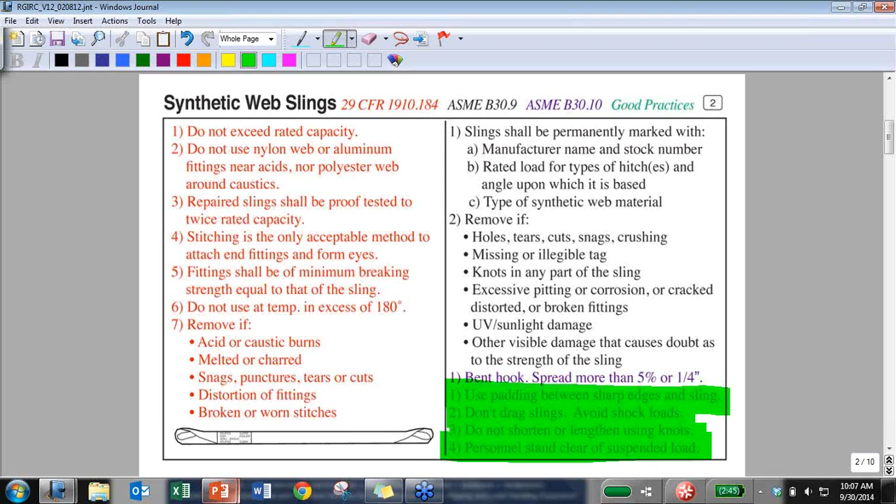Moving back into our presentation, we can see some of the information includes damaged or cut webbing, the body of the web itself. Let me jump into this one more time and see if we can get this going. But one of the things you can see is cuts,

abrasion. What else was there? We could see holes, cuts or snags, and crushing. Missing or illegible tags, that's really from the manufacturer, and they should be the ones that tag those. That's going to identify who made it, possibly when they made it, and what its capacity is. Those are really useful information pieces for the user at the end of the line.

One of the big things about synthetic web slings is they're really susceptible to UV and sunlight damage, and we've seen studies over and over about how much damage they can receive from just being out in the sunlight. Some of the southern states have big problems with this, so they keep most of their equipment stored indoors and out of that sunlight. I think that's good, but even UV damage from indoor lighting can cause problems.

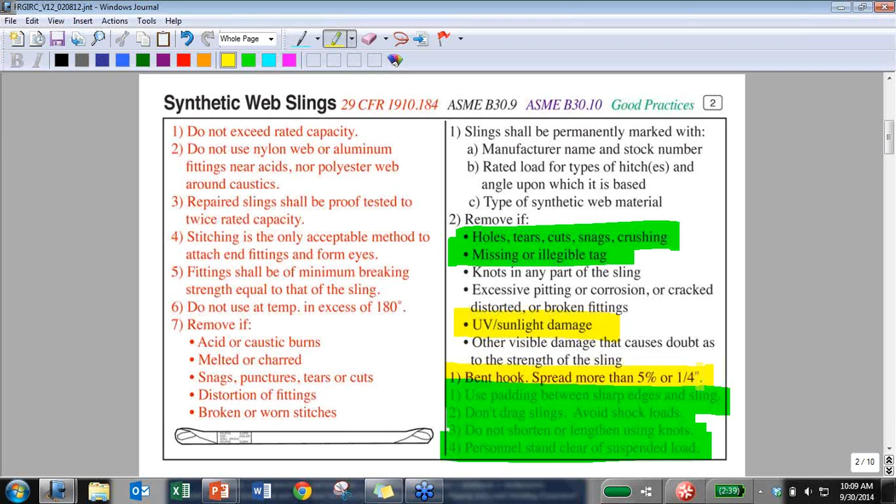Moving into this category again, it doesn't only include the web sling itself. If you look further down, notice the comments here: bent hook and spread. The hook is spread more than 5% or a quarter inch, and that has to do with the end fittings, referencing B30.10. The end fittings also count as part of the synthetic sling, so even if the web sling is perfectly fine with no cuts or damage visible, the end fitting still matters. It's sort of the weakest link, so to speak.

And so when we look at this, we're looking for end fitting damage. Moving on, we'll talk about the tag as well, right? We talked about missing or illegible tags. Much of what we see in synthetic web sling removal criteria can also be said for chain sling removal criteria. Let's look at the next slide down here.

Panel 3 of our rigging gear inspection card also talks about alloy chain slings. We get a lot of our information here from ASME B30.9 as well as point 10, because that deals with the end fittings as well. We use chain slings a lot for heavy-duty knuckle dragger type work, meaning we tend to put them in environments that are caustic and abrasive, expected to do really well, and they tend to. But we still need to be aware that hot or even cold environments can really play a major role in reducing the capacity of our rigging gear.

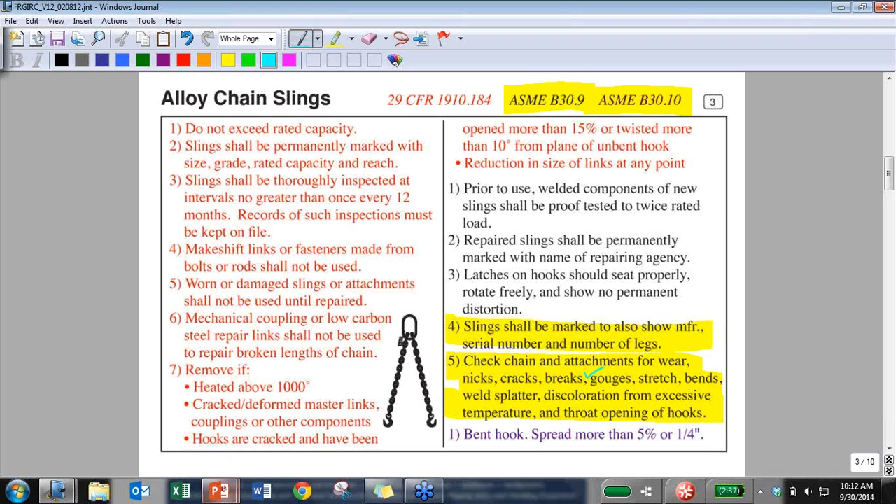Discoloration or from excessive temperature, weld splatter, stretching of any kind, gouges, and of course breaks. If we see any of those, we really want to remove it from service, take an evaluation of it, and see how it can perform or how it can be made whole again.

And so we'll look for gouges, stretching. Again, the tag itself should have capacity as well as who made it.

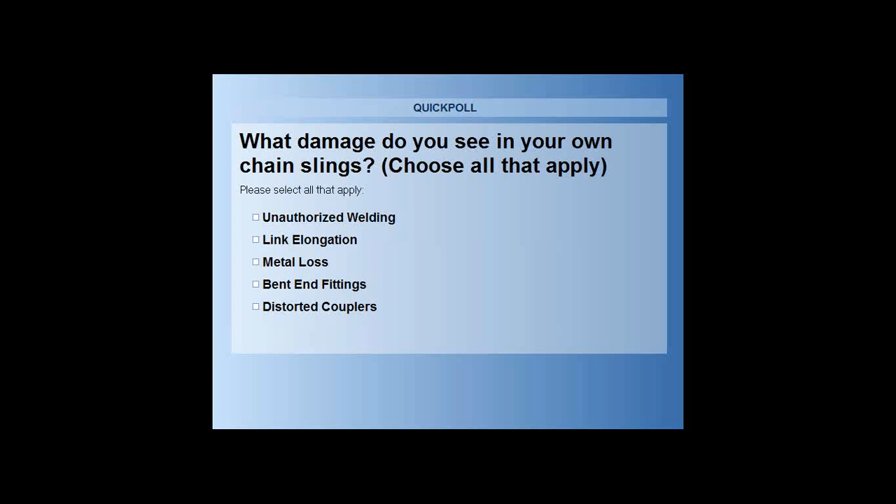Great, thank you. Yeah, thanks everyone for taking our polls and just providing a means to discuss. It really, end fitting damage, I think it occurs a lot of times because we choke chains around all types of things. I mean, I-beams and bundles of loads, and really that's the piece that gets kind of wrapped and bent around those things, and you can see a lot of damage.

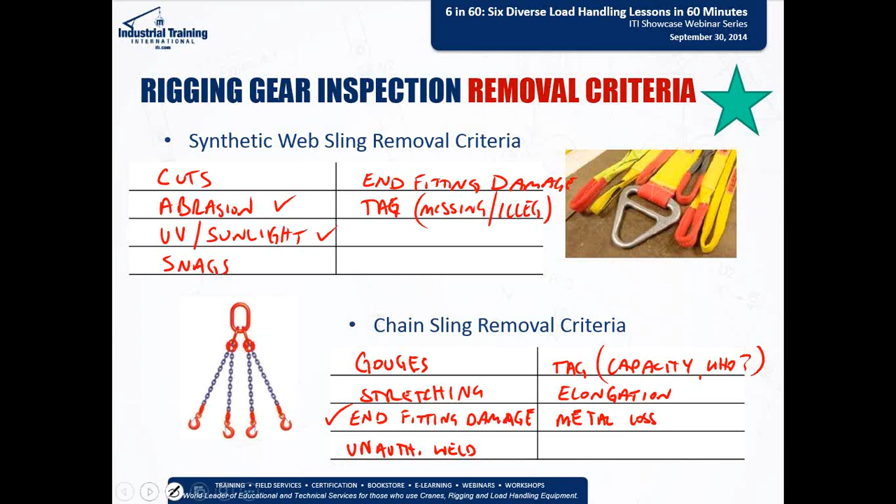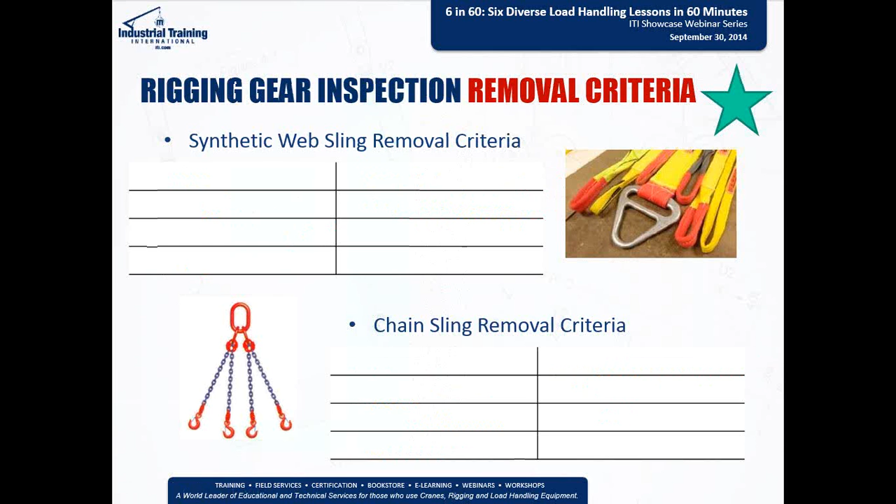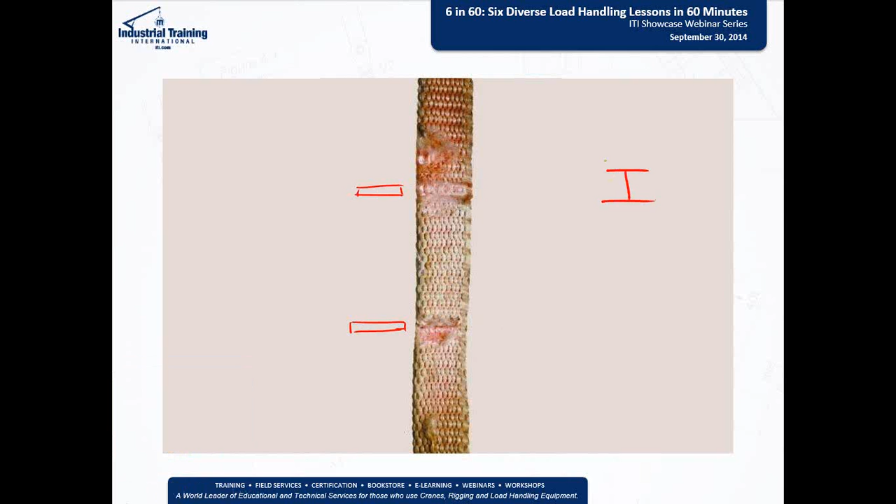We're going to take a look now at a couple examples, and I just want to talk briefly. If you look at our first example, we'll talk about synthetics first, then chain. If you look at the damage here, we can almost kind of see this really even section of abrasion, maybe some cutting in here, and it's possible that the sling itself was possibly wrapped around an I-beam like this, and really those points of contact are going to be where we see a lot of damage.

Some people even say it's just the surface strands or surface pieces of the nylon itself, and the real strength is underneath. But gosh, it isn't like a sheath. The web sling has webbing all throughout it, and every fiber provides some form of capacity. So taking some of these fibers away really reduces that capacity.

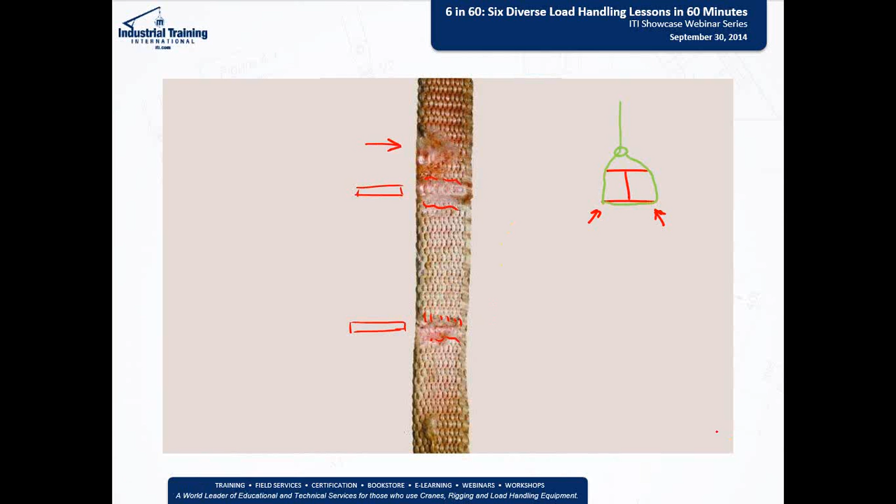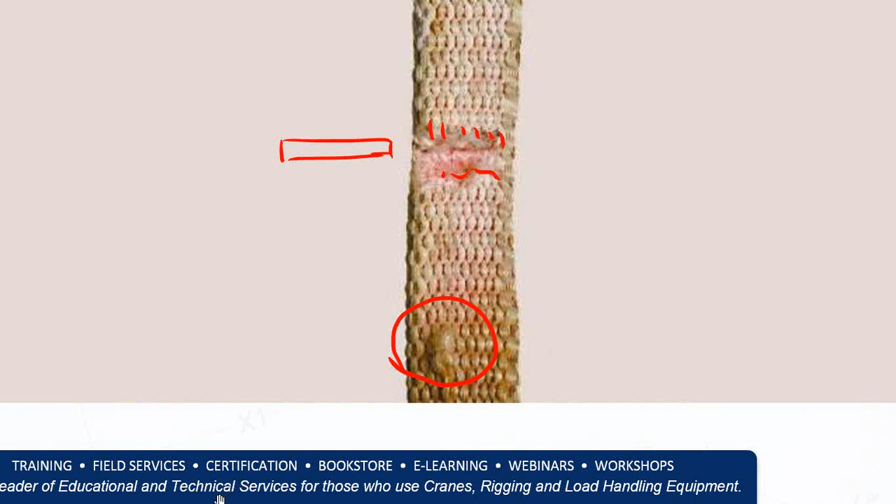We also notice a snag up here. If anybody else can identify anything, there's actually one more, kind of hard to see, but if you look down here, there's a snag at the bottom, and it provides a visual indicator that something's not right about the body of this web sling, and we can start to see a little bit of capacity being removed from that sling itself.

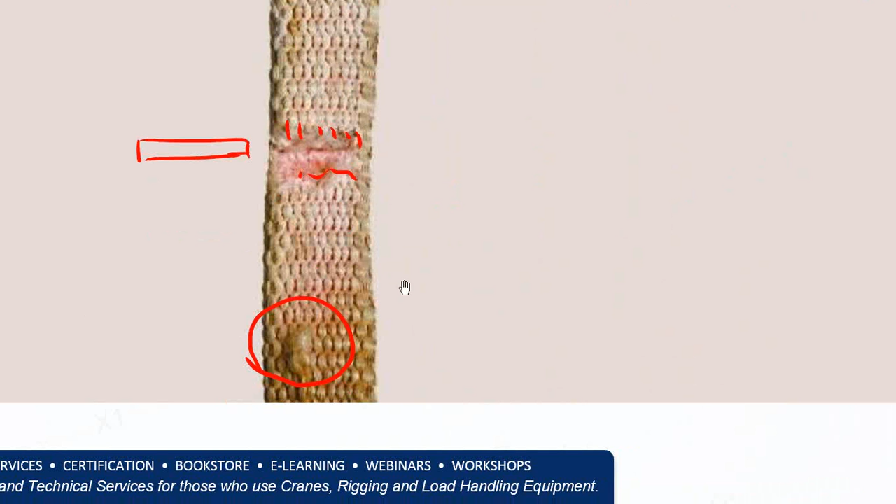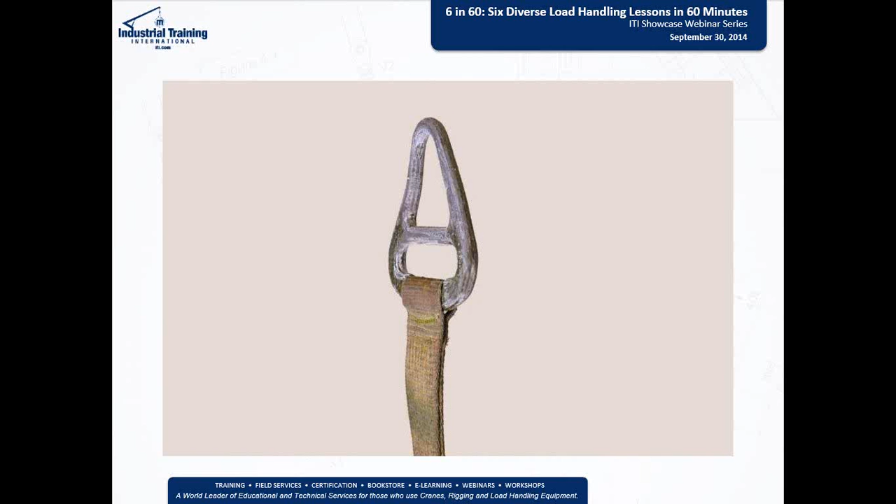So we just want to make sure we're identifying these things as we see them. Let's move on to the next sample here. Possibly even the same body, but now we've attached an end fitting to it, and end fittings do count. We talked about end fittings as a link in the chain of capacity, and if we see damage there, we need to consider what other damage is present, and also how much damage has taken place, and possibly remove it from service. But if we look at this end fitting here, we can see a bowed shape on the top triangle section of this triangular master link.

There are design factors for slings themselves and hardware you can attach to them, and if we see a bent fitting or a bent end fitting, we've jumped right into that design factor and taken it up to its yielding limit, not even its working load limit, but its yielding limit, and we're starting to change the structure of the end fitting as it was originally made.

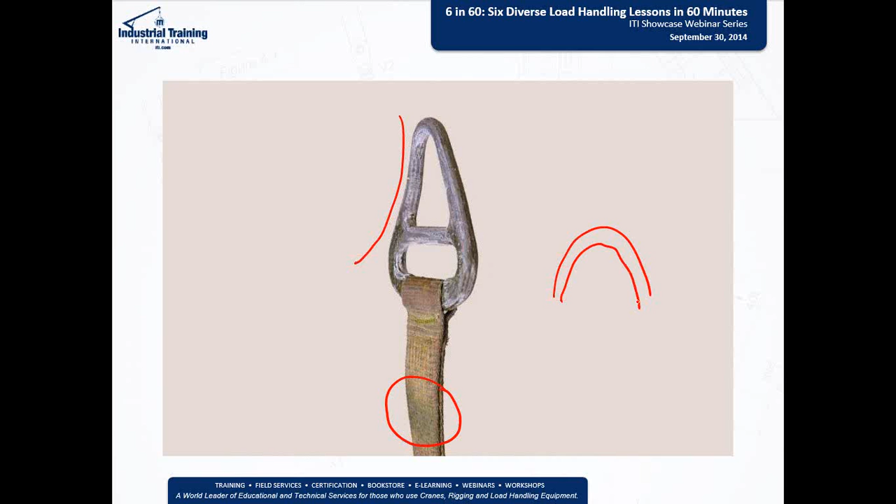Possibly also some maybe chemical or oil damage down here. A way you can tell if something's been chemically introduced to a web sling is, sometimes it'll burn and start to abrade, and when you bend it around a piece, you'll start to hear little crackling taking place, and those are the actual fibers that are breaking in that web sling. So, excellent examples here.

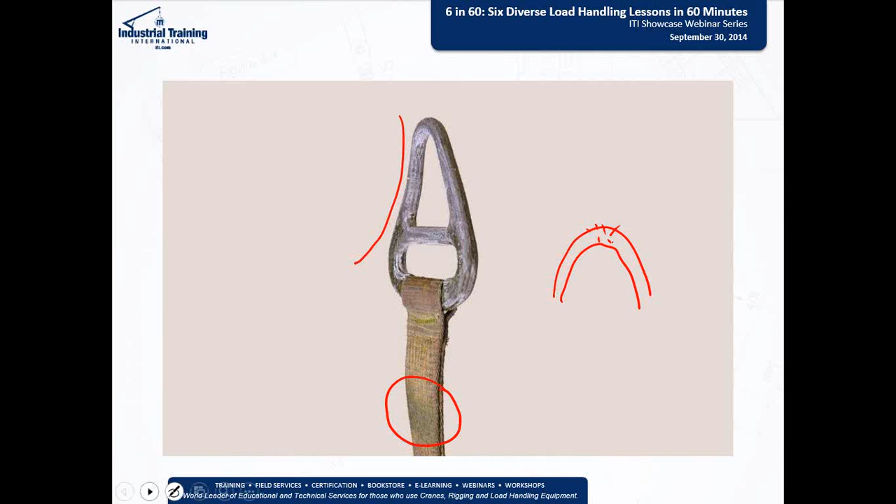Let's move on to some chain examples. Immediately, if you're looking right at the center of this chain sling, we see maybe a crack right here, and these are just some ways to identify damage. This chain link really looks damaged in some way, like it shouldn't bend, or maybe if it does, it can't bend anymore.

Maybe it's been elongated further. Maybe it's possibly a low carbon type fitting, which we don't typically use in rigging, and so it's a way to identify, and that's the last thing you want to see when you throw that choker around the load there.

Another thing too, if you notice the elongation here, typical chain links tend to have a strong oval presence, and here we can see we're almost pinching the middle as the chain is elongated, and it starts to suck in. It's actually one of the visual indicators of chain slings being elongated past their capacity, and so we've taken this sling over capacity itself.

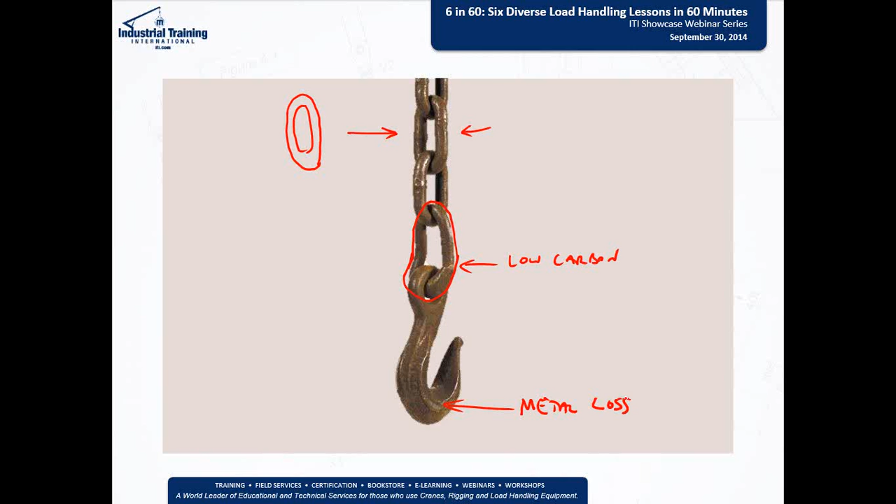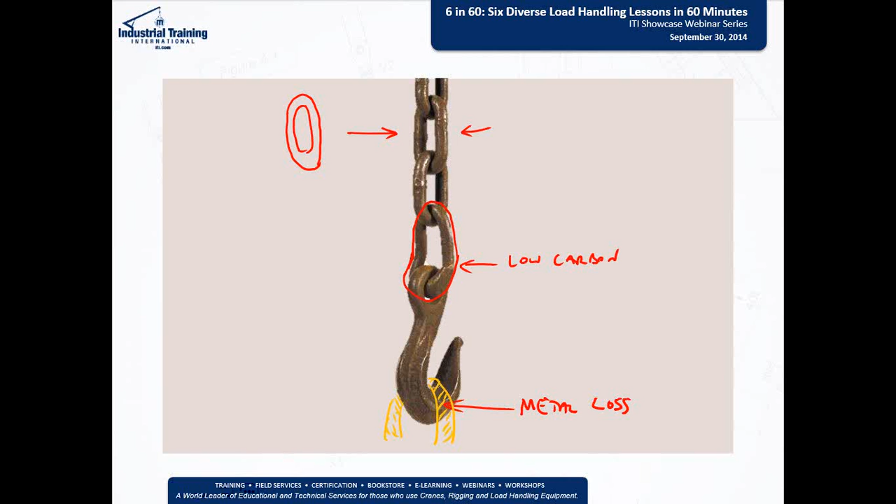Also, what happens if you put a web sling into this hook? What is that going to do to that web sling itself? If we drape or rig a sling or other piece of hardware into that hook, what is it going to do? Will it snag on that web, or will this web sling snag on that metal loss piece? Maybe it's a sharp piece or a sharp end. And what kind of damage is that going to do?

How do we know how long the chain is supposed to be if we never know its original length and measure that against that original length?

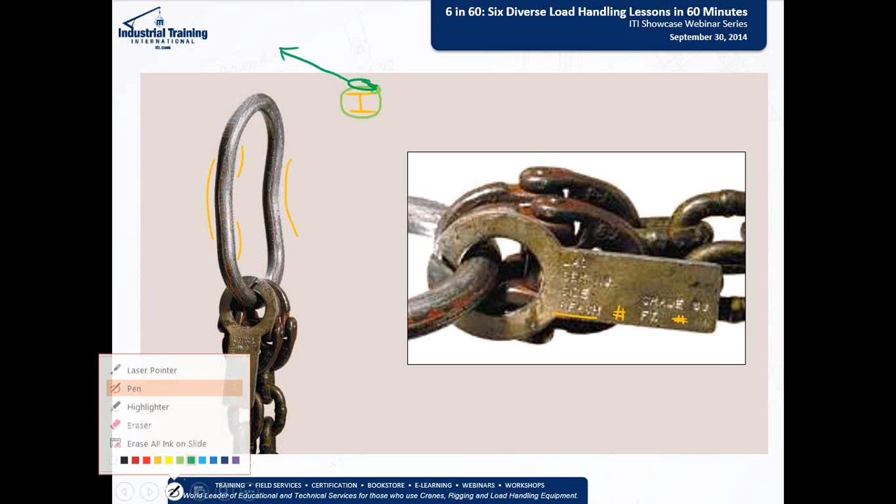One last piece here is the master link is drastically bent. You can see a couple concavities throughout that entire body, and this happens commonly if we're rigging from a top-down view. We're rigging from an I-beam, say a column, and we take maybe a choker sling or choker hitch around here, and we attach a chain sling to it. The master link comes off this way, and now we've all of a sudden changed directions, potentially from pulling this way to now pulling south here, really bending that body around the master link or the column itself. That can really damage the master link and reduce the capacity for that entire chain assembly.

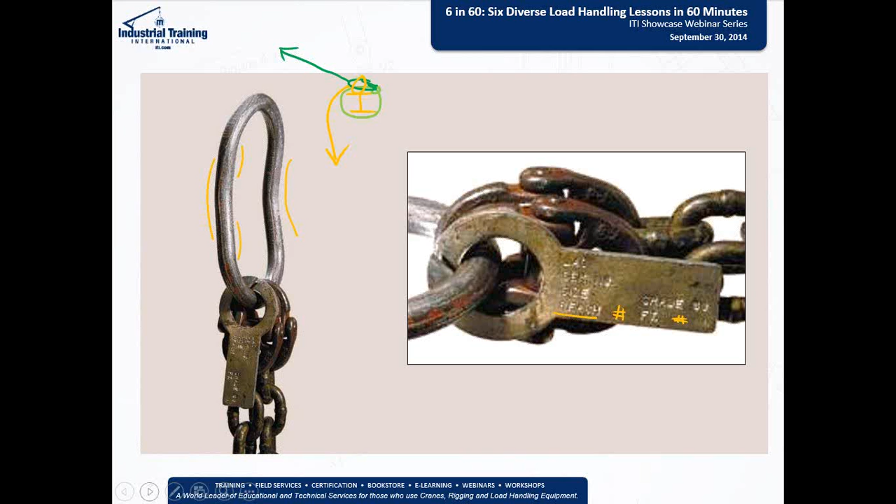So we've looked at some samples here, and we're going to move on, but these are just some examples of general use and wear for web slings as well as chain, and looking at removal criteria for those things.

The next topic I want to talk about is in the advanced rigging section. The subjects we talk about often are inclined planes, load control, a lot about center of gravity—where it is, how to find it, and how to rig to it—snatch blocks and winch systems, come-alongs and chain falls.

A lot of times not every industry or user has a chance to experience drifting of loads, but it's good practice to get familiar with it and see what else is out there. Jack and rolling rigging is sort of the horizontal rigging we introduce in a lot of our classes—again, hardware from companies like Hilman and Stearman. There's also, I'm sure, lots of other horizontal rigging companies that use rollers and those types of things, but really exposing guys and gals to our different pieces of hardware in the industry.

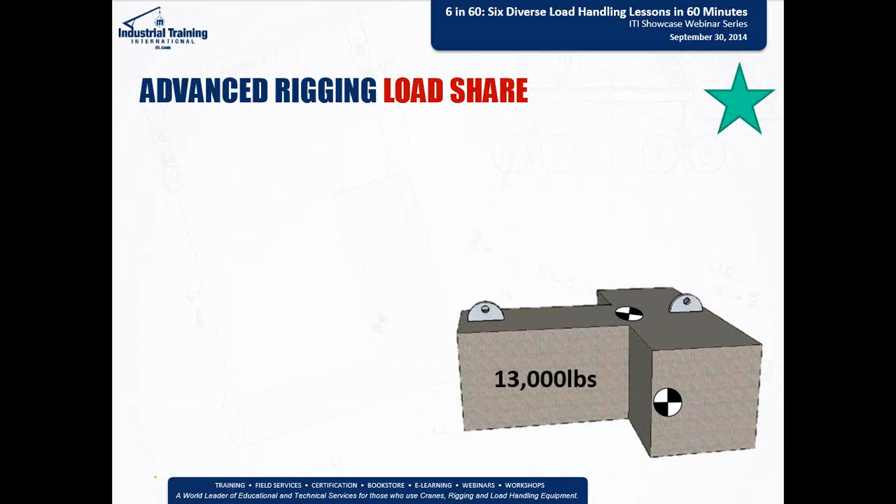We've got a poll question here in a second, but let me introduce you to the load itself. We've got a 13,000-pound load. We're going to get a little expensive with our rigging and crane operations here, so we're going to lift it with 2 cranes, one on lifting lug A and one on lifting lug B—I'll reference crane A and crane B respectively. All we know is that we've got a center of gravity logo here, and that's where the center of the weight and mass is located, and some distances—the distance between crane A's pick point and crane B's pick point to the center of gravity.

Well, intuitively, let's talk about which crane do we expect to have the most load? Just kind of looking at it and thinking about it—let's launch that poll question. Based on the load weight and the lifting point's location relative to the center of gravity, which lifting point will lift more? Your choices are A, B, or they'll have an equal load share.

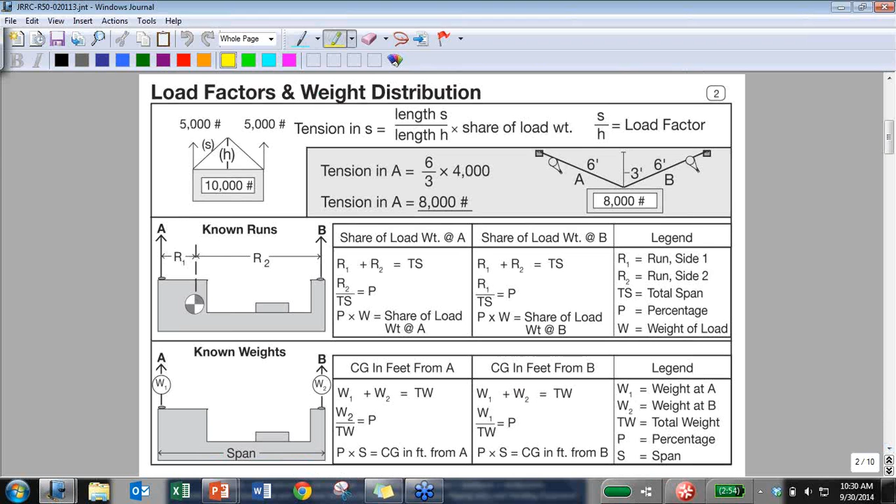If we look at the Journeyman Rigger Reference Card, panel 2, we talk about the share of load weight at A and share of load weight at B, and we're talking about these 2 pick points. It's really a similar problem here.

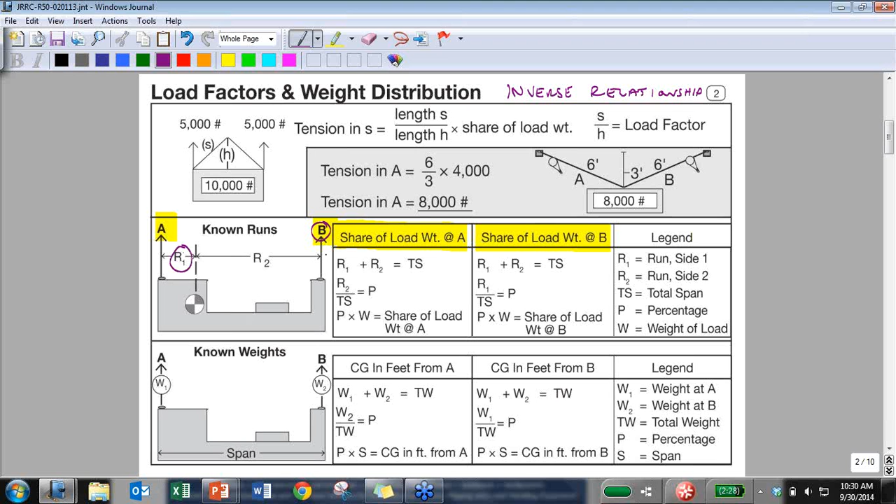But if we look at how to come about these answers, we look at a term called inverse relationship. That's just a fancy term for whatever happens between the center of gravity and, say, pick point B. We're going to use the span between A and the center of gravity to figure out the loading at B. I'll show you how that works.

It's really a cool concept. It's something everybody already knows intuitively, physically, but when we put it on paper and get guys out in the field, this is kind of a newer concept they have to learn arithmetically.

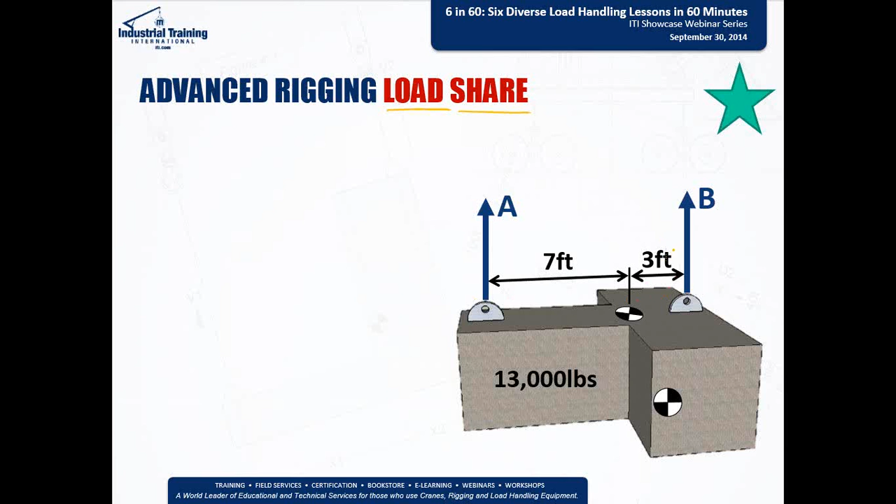So if we take a look at this concept, let's take A for instance. At A, if we look at the inverse proportion, inverse relationship, we know the loading is going to be some proportion of 3 divided by the entire span, which is 7 plus 3.

So this is the equation, and this boils down to what we can give as a percent or a fraction of the total weight if we're only using 2 pick points. In this case we are, so we're looking at 30% of 13,000 pounds, which yields about 3,900 pounds being lifted by crane A.

If we do the same type of relationship with B, now we're taking the distance between A and the center of gravity and applying it to B, with the entire distance between A and B. And really, we're going to get 70% of this load.

You'll know you've thought about it correctly if these two come out to be 100%. Can't get more, can't get less if you're lifting with only 2 points. So we multiply that by the entire load, and get the percentage in load form at B, which in this case is 9,100 pounds.

So if we take the entire load out of it, say this was a person sitting at this center of gravity point, closer to Bob on this side, and he was lifting up, and it was further away from Sally on this side. Which side would you rather be on if you wanted to lift the least amount of weight? Side A would be my answer.

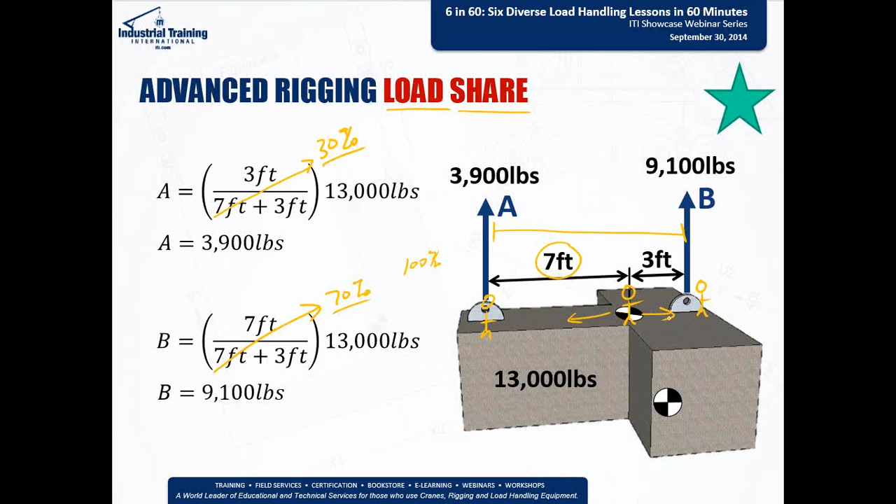Certainly, as the gentleman slides from left to right, he'll start to increase or decrease his share of load across that distance. Excellent. Let's move on.

So we've got an idea of load share itself, and we've talked about A and B. We're going to get a little bit less expensive - we're going to hire just one crane now for our lift and use 2 slings, and we're going to rig over the center of gravity. Our hook is going to come up to this point here.

Now that we've included an angle - the angle I'm talking about here is this angle right here at A - if we know that originally we're lifting 3,900 pounds, the poll question here is: will the increased loading also increase the tension, or sling tension in sling A? Will we get that much less than or more than 3,900 pounds because of this induced angle, because we're lifting and rigging to the hook itself? Jonah, let's go ahead and launch that question and see where we land.

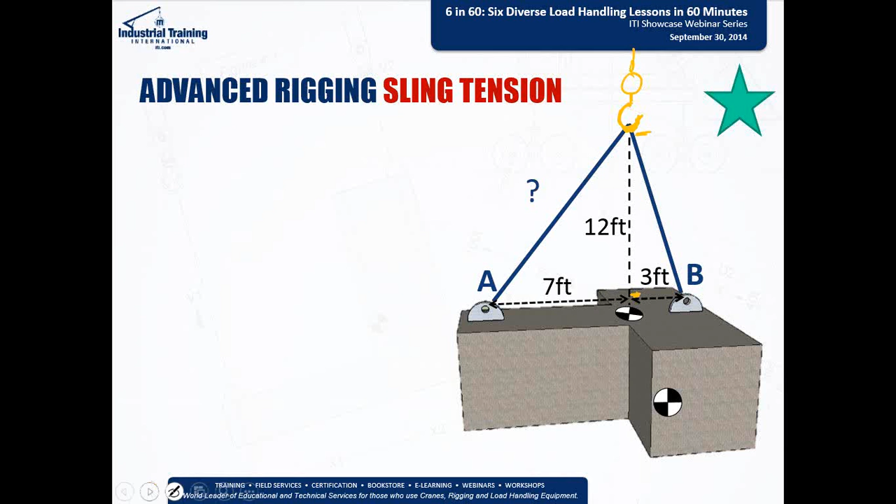Great, thank you. Yeah, thanks for your respondents, guys, and we'll talk about how it actually affects that sling load, or the load inside the tension itself. So if we induce the 12-foot headroom between the pick points and the hook, we still have our distances of 7 and 3 between the center of gravity and the pick points themselves. We wonder what the sling length is, and a quick way to do that is just the Pythagorean theorem.

I think it comes out to 13.8 feet, but it gets really expensive if you go right there to 13.8 from a manufacturer's point of view, so usually we typically round up to 14 if we need it. So I've kind of done that math for you, but if we look at the tension factor and what happens when we induce that angle, the tension factor is nothing more than the sling length, which you got at 14, and the height between the connection point to the hook and the elevation of this lifting point here at A.

Which we found to be 12, right? And so if we look at it, we're just talking about a factor here, so we're not actually going to find the load weight just yet. But if we look at the factor, we get a factor of 1.166. And really what we're talking about is we're increasing the load by 116.6%. That's really what we're talking about here, is when we induce this angle in the load as we start to rig up to the hook, we're increasing that load share in the sling tension by 116%.

And so if we take a look at the tension in A, we know that originally we had 3,900 pounds, and if we multiply by that tension factor, we can arrive at what we expect the sling tension to be when we start to lift this load. And really, this is the number, this is the loading that we should size our rigging to.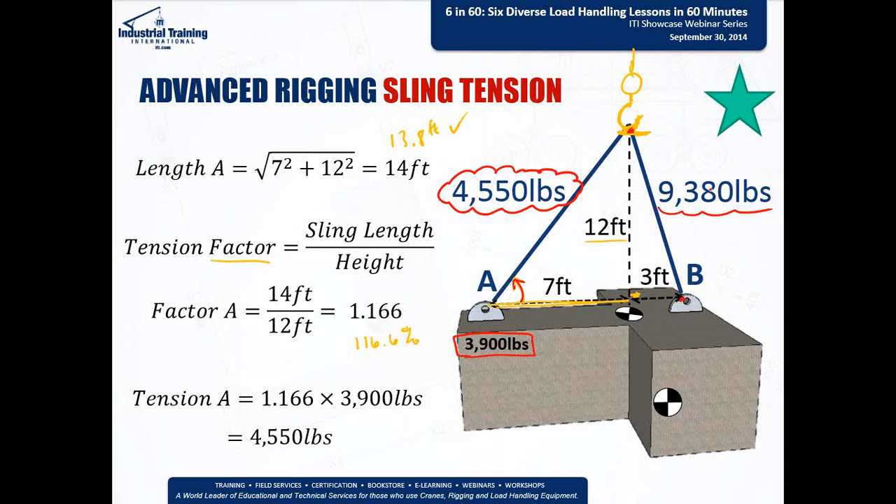Great, I'm glad everybody was able to follow along. If you get a chance and want to do the same type of calculation, figure out the distance between the hook and B, and go from there, and you should get around 9,380 pounds. Let me know if you don't.

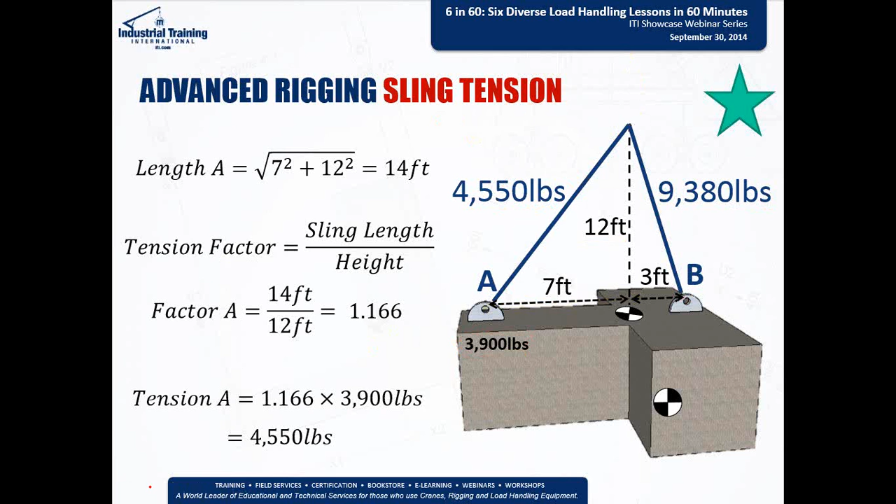Great, let's move on. So one of the next steps is looking at critical lift planning. We've got a course, and a lot of the topics in this course talk about load affirmation. It's a lot of checklists, and we talk about worksite approval, verification of the crane, the load travel path and placement of personnel, confirming that the rigging is inspected and rigged properly, the pre-lift checklist. All these things are kind of in the pool of responsibilities for the lift director.

And so we talk about all these things and how to go about the planning steps of what a lift director should do. Moving into the learning objective itself, we're looking at using a scorecard to determine the requirement of, or to develop, a critical lift plan. And I know in the States we don't really have a set definition of critical lift.

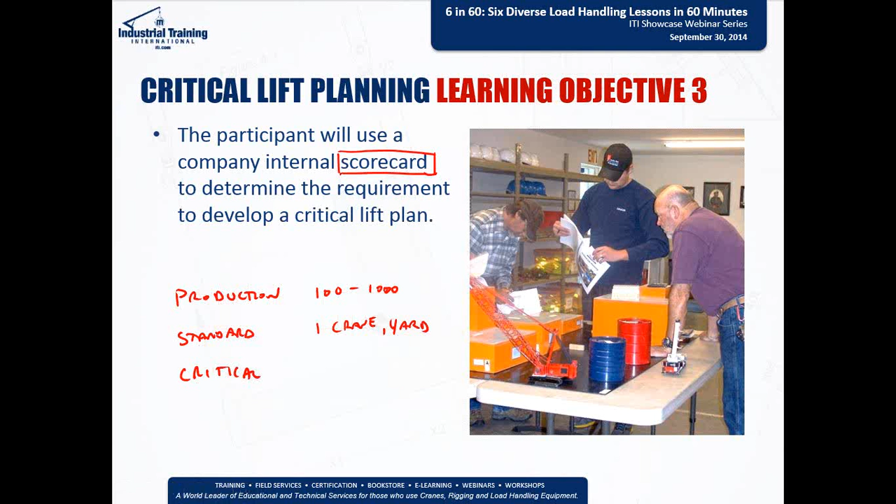It's really independent of the activity, but really dependent on what the company decides is valuable or risky or have you. So we recommend developing a scorecard internally to determine if critical lift planning is needed, with a little bit more scrutiny on the lift. There are times where we have production lifts, and you can do those things 100, 1,000 times, and they're really not going to change. There might be standard lifts where you use your scorecard and it comes out that this is one crane out in the yard somewhere, not really a hazard to anybody. And then in some cases we have critical lifts, and our scorecards provide a means to jump into that planning and evaluate how to determine a critical lift from a standard one, based on corporate priorities.

So if we take a look at the critical lift scorecard, this is kind of how we organize it. We have tons of different subjects here. We've broken down the lift itself into what the company prioritizes - we can talk about man basket lifting being automatically a critical lift, or at least one of the criteria. If we use multiple crane lifts, we've assigned numbers to them. We can also assign load values - this is one way a company says the replacement cost is more than we can bear, so we want more scrutiny for that lift. Moving down, maybe the environment the crane is placed in - an electrical prohibited zone, pressurized materials inside the load, or a turning type lift where upending or inverting occurs - those become very complicated, and this company considers that to require a little bit more scrutiny potentially.

So let's - I think we got one more poll question here, Jonah, is that right? We do. Let me launch that right now concerning the critical lift scorecard.

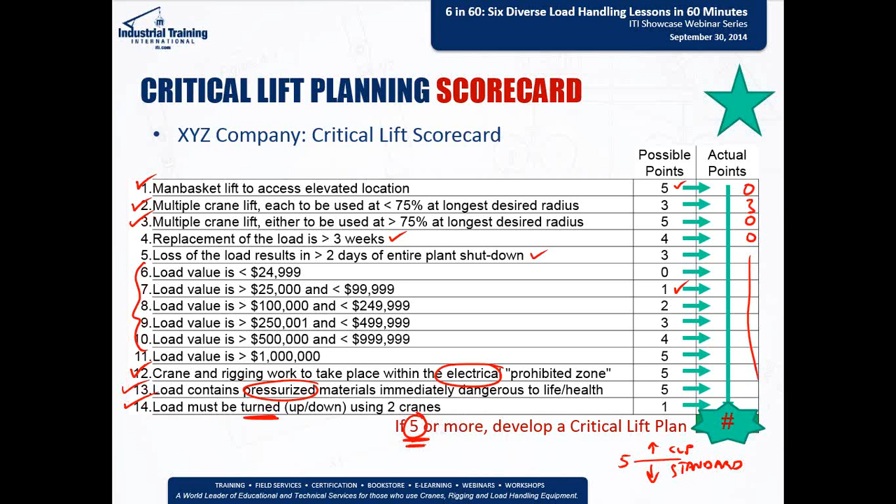We can start to determine if a critical lift plan is needed. So you get a chance to do this yourself. We'll go through an example here and look at the lift parameters for a specific lift. We're talking about one crane here, and you may have the sheet in front of you, you may not. I've got one printed out in front of me.

Going through this, we can determine and develop our scorecard as needed. Looking at the lift planning parameters, it's going to be a single crane lift, so we're going to get zeros for these. Load value is 89,000 dollars, so that gives us a 1 here, and we can limit our answers to these ones as well.

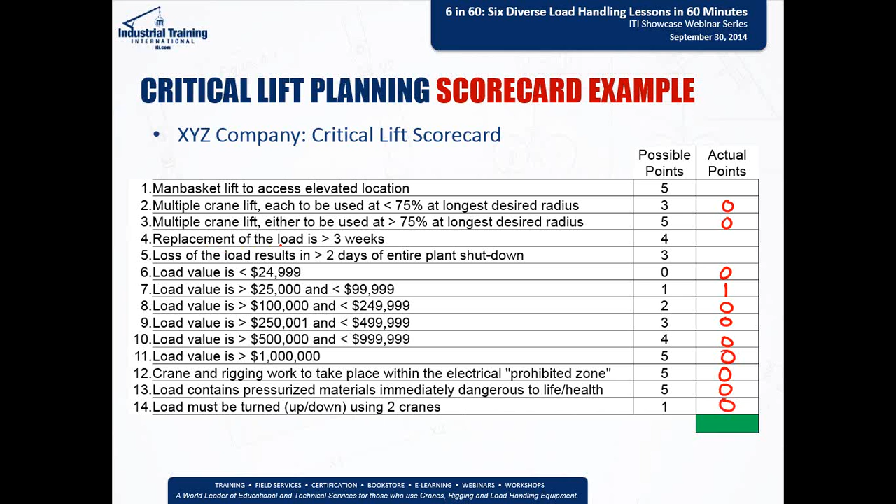No electrical hazards exist. Load's not pressurized. It's not going to be turned upside down or inverted or uprighted. We do see replacement loss of load results in a 3-day plant shutdown, and so here, if it's more than 2 days, we're going to get a loss.

We want to activate this criteria by including it in our sum total. The other piece of information here is load replacement is 5 weeks, and we've got anything more than 3 weeks as our criteria. Correction - we move here and there, not using man baskets at all. So if we tally these up, we see we get 8 as our answer.

If we're being honest, we look at our evaluation criteria. We know 5 is less than 8, and so this triggers a critical lift plan to be developed. We want a little bit more scrutiny for this plan, and we're going to move forward with that. So just a tool to use, maybe internally in your own organizations and crane and rigging operations. Great, let's move on with the next.

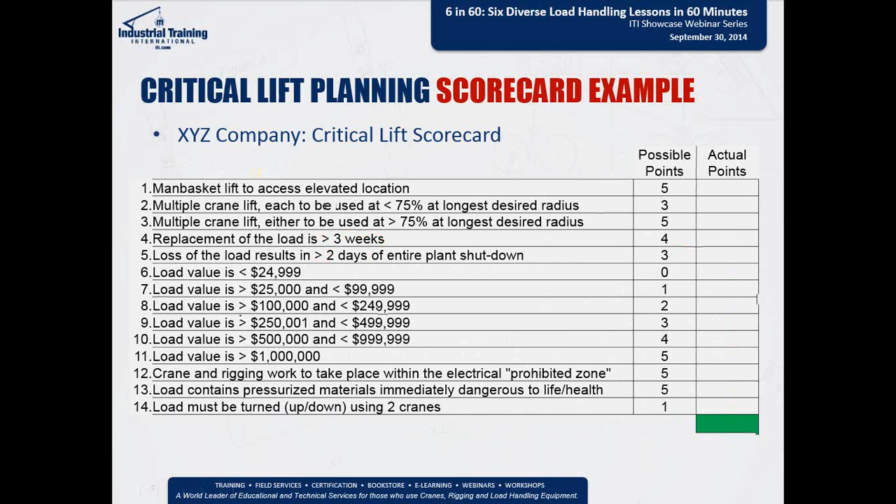It's a quick topic there, but hope everybody's engaged and interested. We're going to talk about mobile crane inspections, and the training subjects here are inspection requirements, based on some of the things we find in OSHA and ASME, as well as other federal regulations. How to do these inspections safely, what components we use or inspect - we'll talk about those different components, and then other additional safety items.

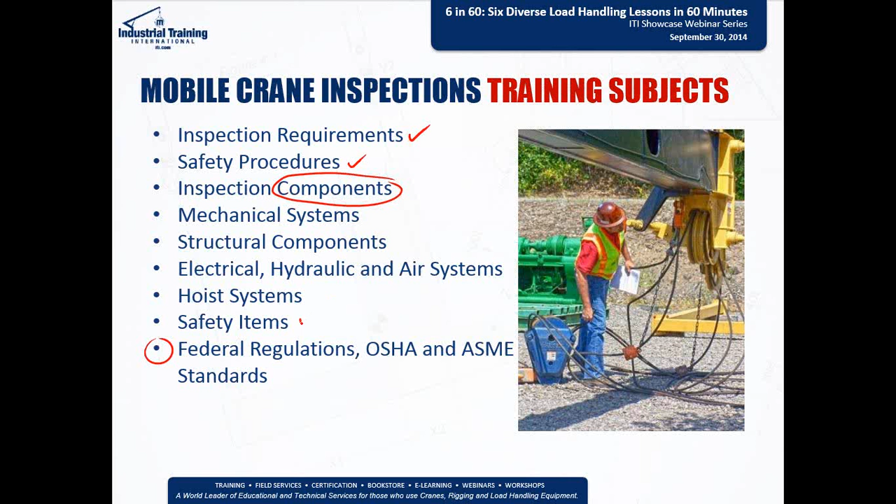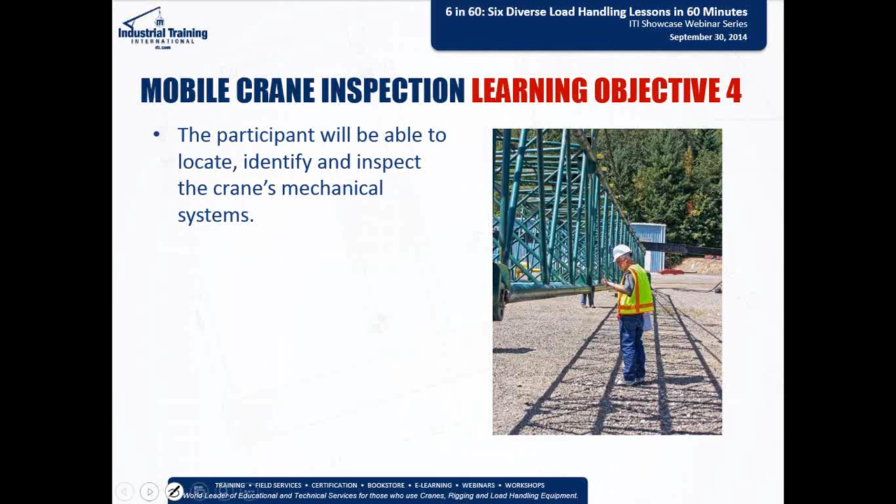The how-to when we actually go in and break down a crane and look at its parts and pieces, and make sure that it's still operational. So the learning objective here is to be able to identify, locate, and inspect the crane's mechanical system. And we'll talk really specifically about one piece of that mechanical system.

In general, when we talk about inspections, we really want to organize our thoughts around a simple acronym, and we use MESH. You may use another one, but MESH stands for mechanical - it could be anything from the engine itself that drives the drums, as well as wire rope. We tend to think of wire rope as a machine, so it's got moving parts, and if one of those moving parts is not moving, then we don't have a machine anymore. So we really want to take a look at that wire rope, as well as the engine and anything else inside the crane that deems it to be in that mechanical area.

We looked at the electrical section - these are the strain gauges, these are the LMIs, the load moment indicators, inside the cab there, as well as any other indicators that we get electronically. Make sure those are functional, operational.

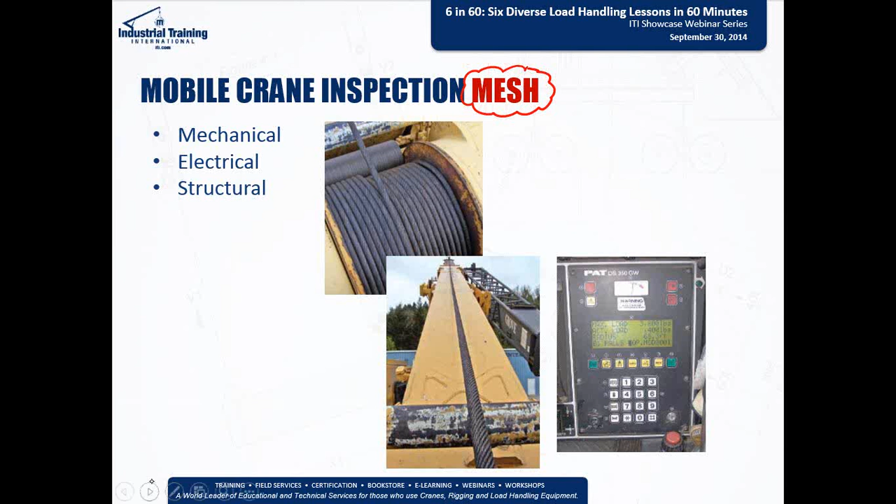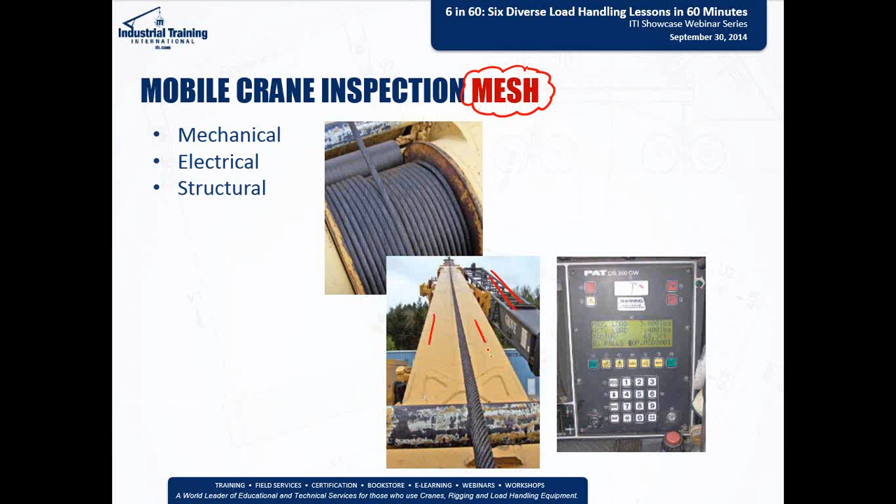Next one is structural - everything from, you see the jib section here as well as the boom section. Any piece that is load bearing or load carrying, that includes the outriggers and the floats themselves - make sure they're not cracked and damaged or unable to carry their loads.

And then the last piece is hydraulic, and typically mostly all of our cranes are hydraulic or have some type of hydraulic system in them. This is the boom hydraulic cylinder here, and then also the jacks and outriggers themselves have cylinders as well - just making sure they're fully functional, the lines are not leaking, no cracks or excessive wear. So just a way to organize our thoughts.

We're going to take a look more specifically at sheave inspection. This is in the mechanical realm.

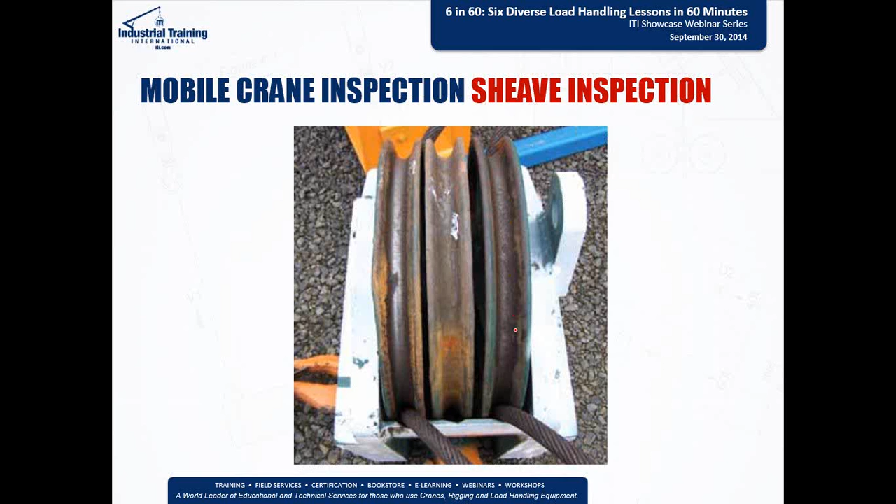Sheaves are found all over - there's rooster sheaves, upper boom sheaves, sheaves for hoist rope, and this one specifically for the hook or block sheaves. What occurs inside here is important, and we'll take a look at how to inspect them properly.

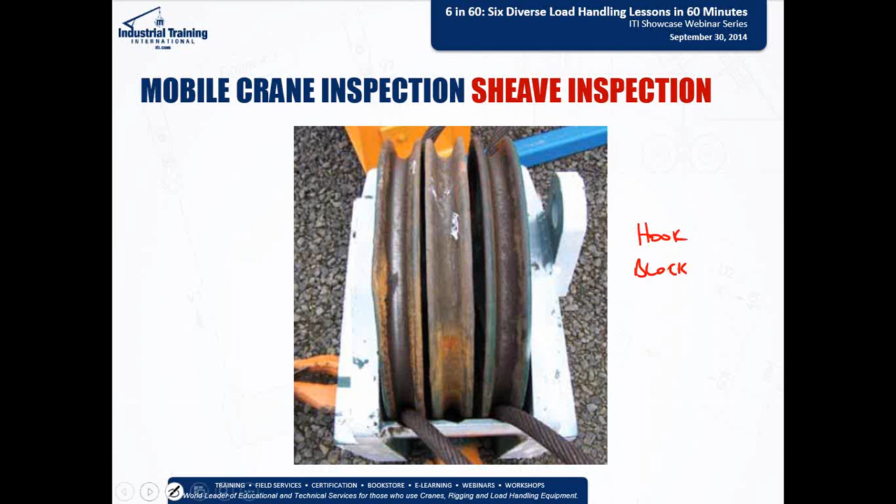Some of the tools we use for this are sheave gauges, and the gauges themselves range in different sizes. They come in different materials as well - some aluminum or plastic, a little bit lighter weight, and we'll see another property that's also useful.

When inspecting sheaves, we want to ensure they have a correct shape, and the shape is important because it holds the wire rope itself. If it's too wide - typically wire rope wants to be round, that's where it finds its most strength - and if we induce a shape on it, such as a wider bowl through the sheave, the wire rope is going to end up flat or flatter as it passes over that sheave.

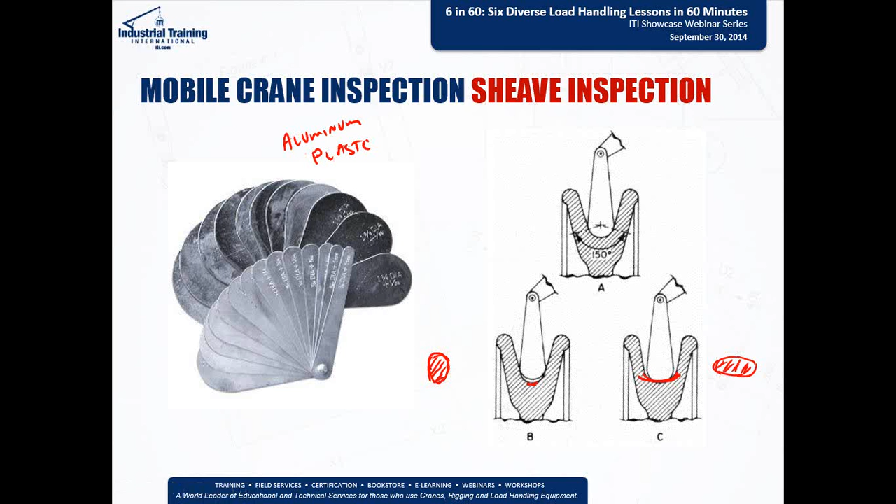Similarly, if we pass through a sheave that's worn down but not necessarily out, we find that the sheave itself becomes pinched in sort of an egg shape, and this does not allow the strands and the wires to move properly as they should.

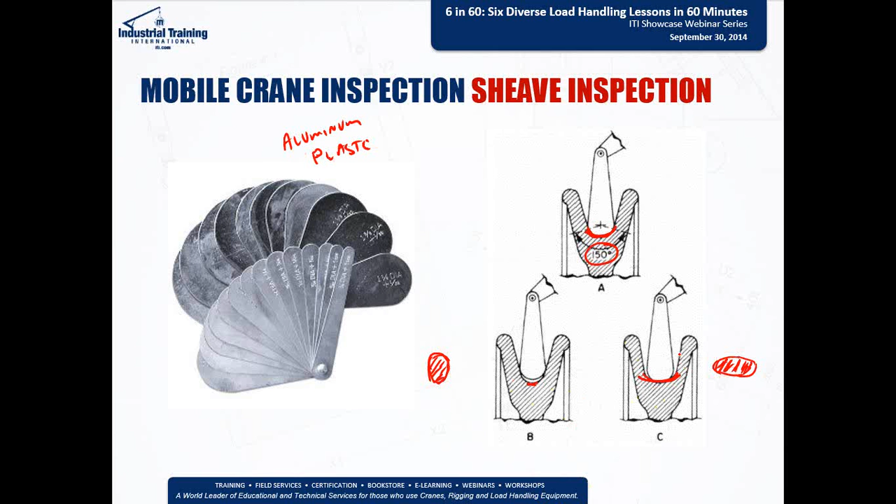So we want to make sure that when inspecting our sheaves, we've got good contact throughout. There's an instance here where we look at the amount of contact, and about 150 degrees is what we're looking for. Anything more or anything less puts a question in our mind about what the wear is in these sheaves themselves.

So we talked about sheave inspection in general, but we want to take a look at plastic sheave gauges - this plastic sheave gauge here. Some of these sheaves are in places with very dark lighting, very hard to see, and it's hard to tell where this interface is between the sheave sides and the sheave gauge.

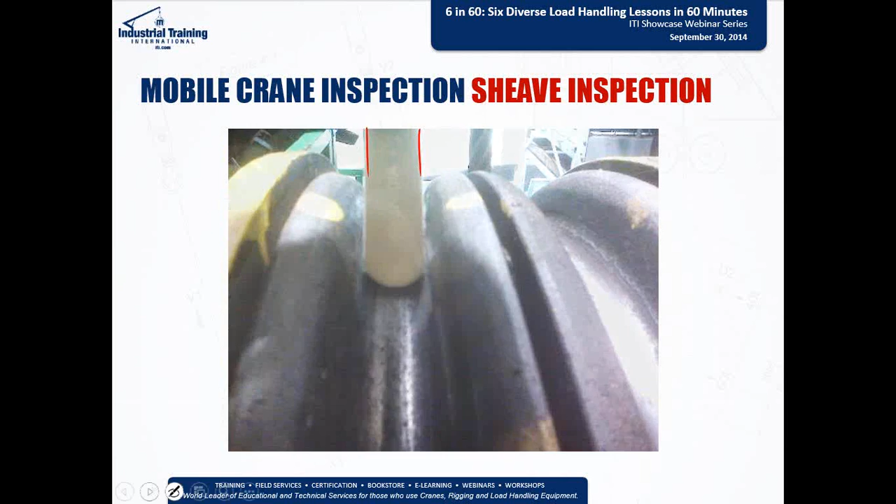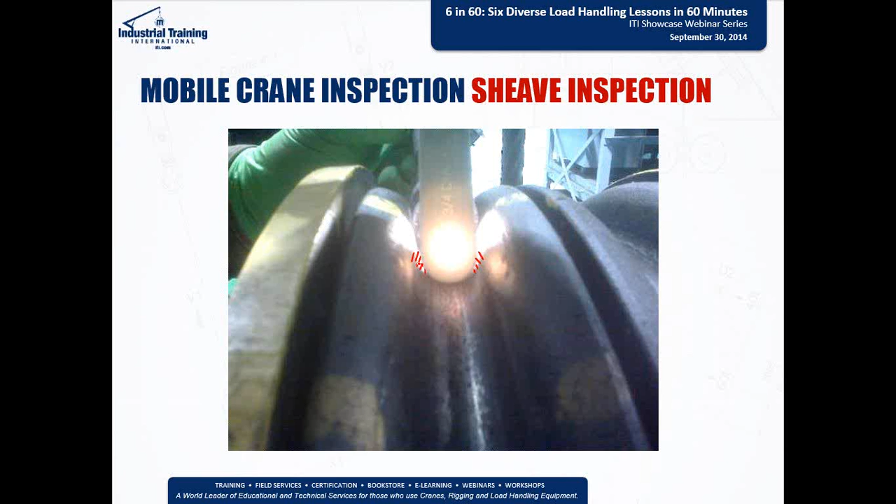But it's easily remedied, at least with plastic sheave gauges, if we add some type of light source behind the sheave gauge and look at it from the other side - we can clearly see there are gaps between the sheave itself and the gauge. Right here is where we start to question whether we're inducing that flattening of our wire rope as it passes over the sheave. Just a nifty trick - you can also do this with metal sheave gauges, looking at the light that passes around the sheave gauge itself. Just one of the tricks of the trade.

My inspection toolkit includes magnifying glasses with lights on them - a really useful technique here.

Moving into the next training subject - that was quick and easy, but let's move into mobile crane operations. Some of the training subjects we cover here are very similar to what we see in rigging itself.

We talk about center of gravity, calculating capacities, boom angle, pick and carry practices, as well as reeving itself and how capacity is affected by that, gross and net loads, as well as all the applicable standards.

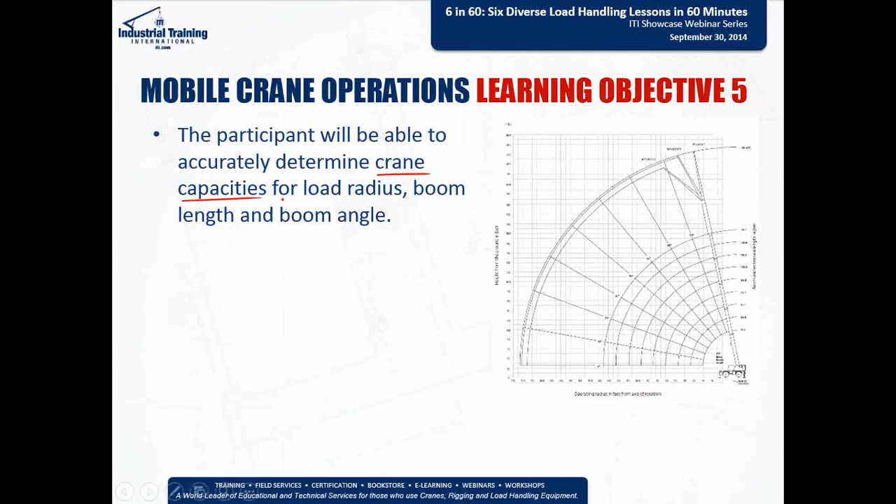Moving into the learning objective here, we're going to take a look at being able to accurately determine the crane capacity for load radius, boom length, and boom angle given a load. So let's jump right into our subject here.

We've got the same load as before, and we're going to add a crane to it. So we've got 13,000 pounds load weight, and we're going to be lifting it with a Grove 890E rough terrain crane. If you're not familiar with mobile cranes, don't be afraid or shy away - I'll introduce you here.

The main cab area where the crane operator is housed sits here and has all his controls, and can operate everything from that position. We've got the outriggers that connect our crane to the ground and provide stable footing - there's one more right back there, and one more right there.

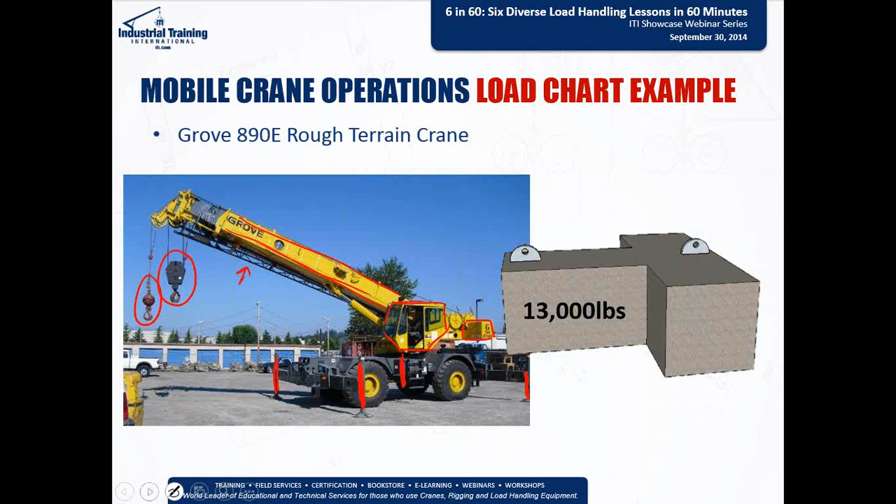The boom itself, we talked about the structural integrity of the boom. We've got a main block here and an auxiliary block there, as well as the counterweight in the back. Tucked up underneath here's the jib, which provides a little bit more reach, and we'll talk more in depth about how to develop the capacity for this crane and how to ensure that we can lift the loads that we're asking it to lift.

So we've got a little scenario here. We'll talk about it and then ask a poll question. We want to look at our approved crane area, maybe it's the pad size that is the approval aspect of this, or maybe the ground has a ground bearing pressure allowance, and so we're able to set up here. In our scenario, we can look at where we want to begin our lift and where we want to finish it. Maybe we're moving across the yard and this is its final position that we want to be in.

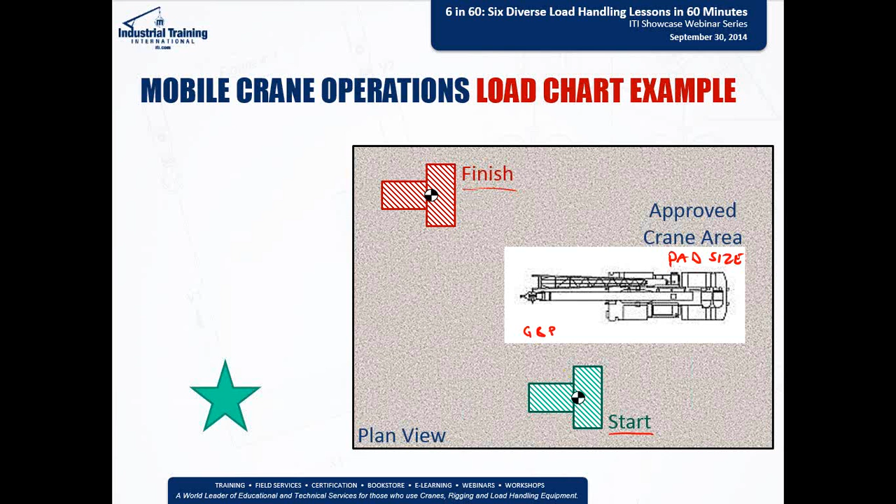One of the first things we need to know is the radius, and we measure the radius from the center of rotation - I'll mark that here with an orange dot. We measure from the center of rotation to the center of gravity of the load, which is so important to find first, and then work backwards from there, because ultimately the load is going to find itself under the hook once it's lifted. If we look at some of these numbers here, the start radius is 50 feet, and the finish radius is 65 feet.

I want to ask a quick poll question, just in terms of what you think intuitively: should we have more capacity or less capacity based on the radiuses we've identified here? And Jonah can take that away.

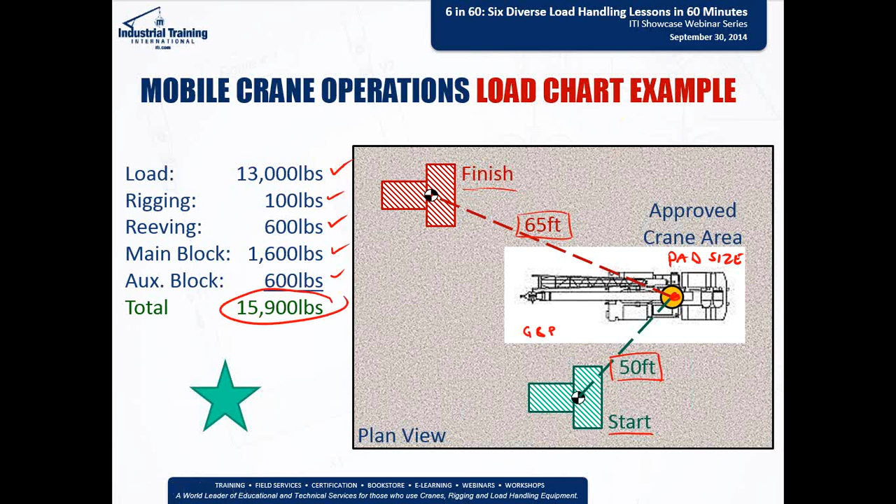There's rope reeving itself, so anything between - some crane load charts say - between the boom tip itself and the load, you count all those parts of reeving and multiply by the unit weight, and you get the loading there. The main block has a weight as well as the auxiliary block, even if you're not using it. All these things count into our total capacity, or total gross load to be lifted, and that's the number we're actually going to use to find our capacity.

So moving into the load chart, I'll just give a quick orientation of the load chart itself. We've got really some qualifiers to jump into before we get into this load chart itself.

We want to make sure that our outriggers are 100% fully spread. We're using 22,000 pounds counterweight. This load chart is only good between 37 and 141 feet, and it's also good for 360 degrees, so any quadrant of operation.

The next piece is the radius itself. We calculated that before, and we could find that in general you'll see increments of 5 as we go, and that's just the radius between the center of rotation and the center of gravity, and that's how we jump into this whole chart. Next piece here is the boom length, and this is really for the operator to assist him or her in determining how high they need to be, or what boom position they need to be at to lift the load.

This also could have something to do with how high can I place the load. So if I run out of headroom, we'll call it headroom between the ground and the boom tip, it can really make an effect if we have to lift the load to, say, 120 feet, but for instance we only have 115, that may cause a problem. We may need to reevaluate our lift.

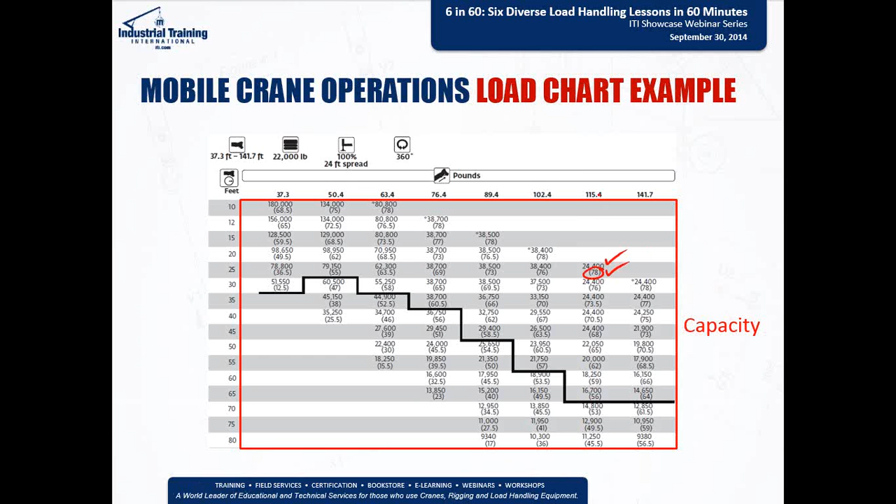And so the last piece here is the capacity piece, and that's what's in the body of this entire document. We've got capacities on top and boom angles on bottom, and so these are just helpful identifiers to help the operator determine where he is on his load chart.

So moving into our example here, we're going to answer this question. Given the furthest radius of 65 feet, we're going to figure out what is the highest capacity we can have to lift this load. And we looked at, intuitively we all think that 65 feet is going to produce a lower capacity for the crane, and it's absolutely right. We're going to find out. So it's a good place to start, and we'll check the 50-foot radius afterwards just to confirm that we have capacity in both radii.

And so looking at jumping into our capacity chart here, we look at the radius first. We read over, and we can see we've got 13,850, 52, or 15,200. We know that we have a gross load weight of 15,900 pounds, and once we come to 16,150, we have a choice to make, and really we're asking for the highest capacity we can achieve, and the highest here in this case is 16,700 pounds. And so that gives us a little bit of a margin, a little bit of an envelope to provide some stability and safety.

And so it's interesting, we actually get more capacity at a higher boom length than the next one over, 102 feet. So just an interesting thing about Grove cranes, or this Grove crane specifically. So we can identify this as the highest capacity for this radius.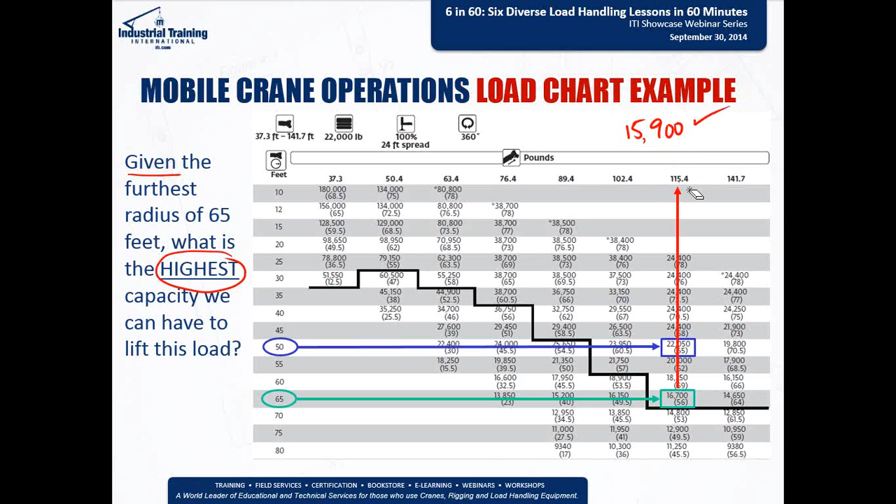So if you've never been introduced to crane load charts, you just have, and hope it was an easy, good experience for you. There are much more deductions. The small fine print of crane load charts can be kind of daunting sometimes, but nothing to shy away from for sure. Let's look at our last topic here.

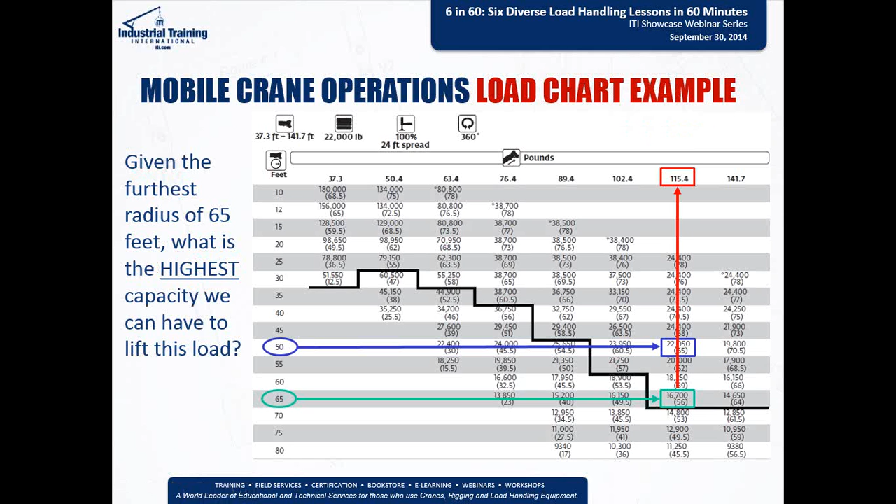We're going to be introducing a rigging engineering program and an overview of the courses that we're going to be offering. Everything from an introduction, cranes and derricks, rigging equipment and applications, alternative LHE or load handling equipment, and then lift planning itself. So this could be a really good course for the senior supervisors, lifting engineers, any of those types of roles and responsibilities in your organization could really benefit from this course.

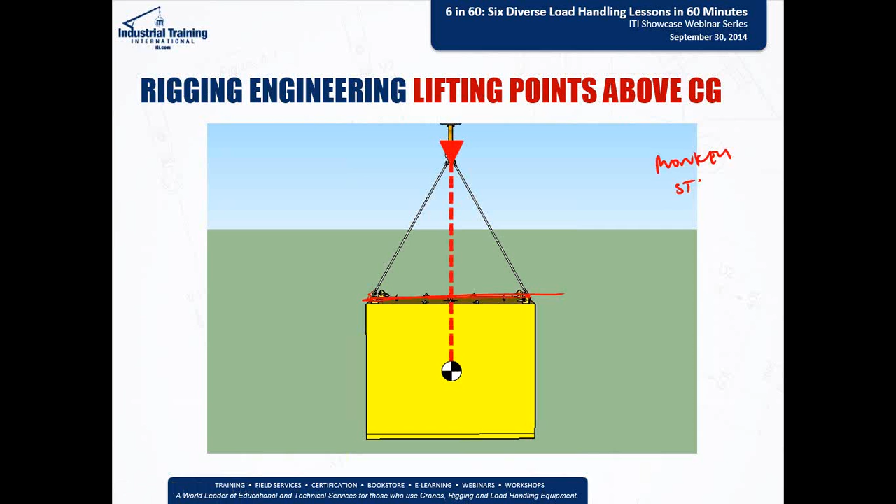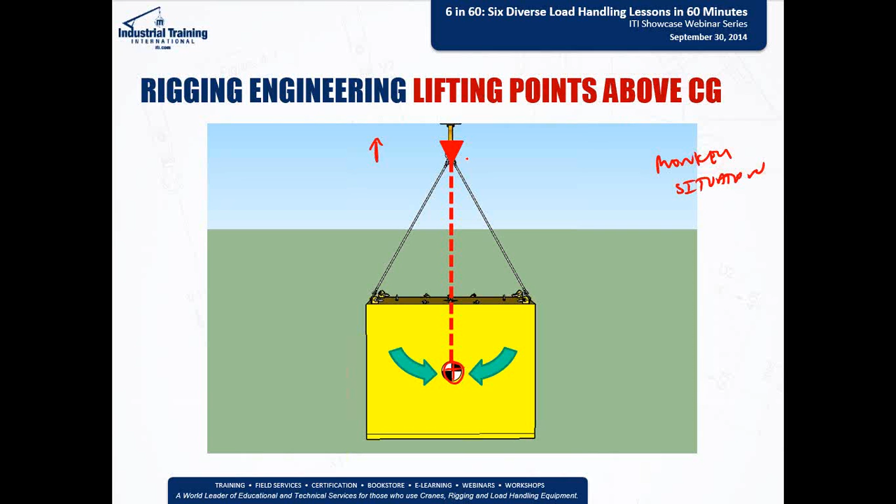So if we look at where that hinge point lies, we have what appears to be sort of what we call a monkey situation. This is where we can start to identify load stability, and we inherently know that this load wants to come back to center if it does get unstable for a brief moment of time. Maybe we're hoisting up and the hook isn't exactly centered over the load, and maybe the load swings out a couple feet, but we know that the center of gravity of this load wants to fall underneath that hook. So we've got a stable condition here.

Let's take a look at another example where we've changed our lift points to below the center of gravity, but our hook and our sling attach above. The first thing we need to do is figure out where's the center of gravity, and then where's our hinge point - our hinge point is going to be the same location. This is kind of where this load wants to move, in terms of center or stability.

What we can say here is we have two cranes, and this configuration is even on the other side, lifting the other position there. When those two cranes lift, even though we're seemingly capturing the center of gravity, we want to make sure that it doesn't come out of its sort of triangle here - and there's actually a way to look at that and measure it.

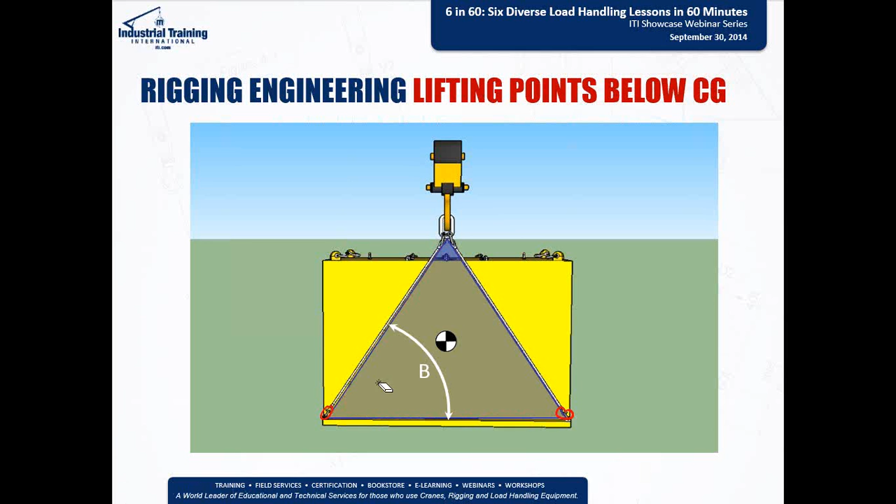If we look at the sling angle made by the sling itself and the lifting point, we kind of see this stability triangle emerging, and it's capturing the center of gravity. The next thing we want to know is what is the angle from that same lift point, or lifting lug, to the center of gravity?

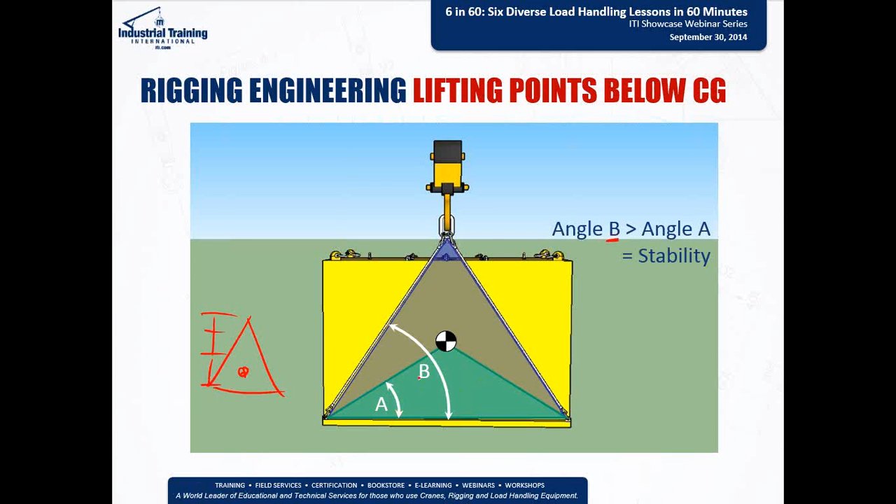If angle B is greater than angle A, we know we have a stable position, at least to the point where if we check the dynamics, this center of gravity won't move outside, possibly by overturning or dumping the load. Care has to be taken for what we're comfortable with. In a lot of cases we recommend placing the center of gravity, if you can, in the bottom third of that stability triangle. It doesn't prevent overturning, but it provides a means to fight against it. So we can check these angles and ensure we have a stable position.

Every once in a while you'll see a crane accident, and without even knowing it, the rigging method will have been produced in this manner. The hinge point in this case is below the center of gravity, and we can see that we have a man-on-a-tightrope type condition where our center of gravity is at the whim of gravity itself.

We can see this same rigging configuration placed on the other side, and we're lifting with two cranes, so we can still check our sling angles. Looking at it from the top, we've got a whole load here, and the center of gravity is right in the center, and I've got two cranes lifting on either side of it with two slings, and we're hoisting. We've got it captured, right?

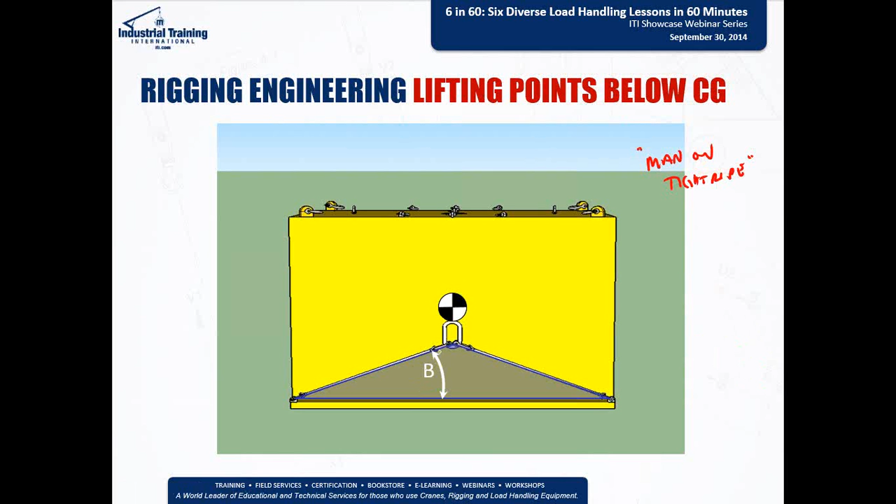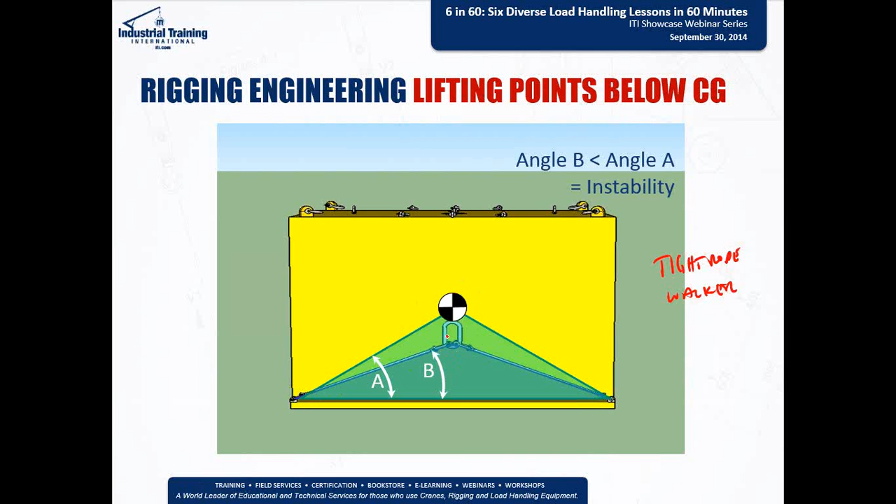The problem is that when we look at our sling angles, not only is this an extreme sling angle for its method altogether, but the hinge point is below the center of gravity, and this angle here is much less than the angle of that same center of gravity point to the lifting lug. So we see that we're inherently in an unstable position, like I said before, we've got the tightrope walker situation. So we can start to visualize what this looks like and how we can engineer or reconfigure our methods of rigging to overcome this problem.

Let's take a look at our first example we saw originally, with our little center of gravity logo. Looking at it from the side view, we can notice that we're in a monkey situation, a funny term, but we're in a monkey situation here, and the hinge is above the center of gravity. But how do we ensure that the sling angle is much greater than our angle to the center of gravity? If we take a look at the angle made by the sling, it's B, and we can also look at that same angle to the center of gravity, or that same lift point, and see that B in this case is much greater than A. When we said that before, we knew we were in a stable pendulum type position.

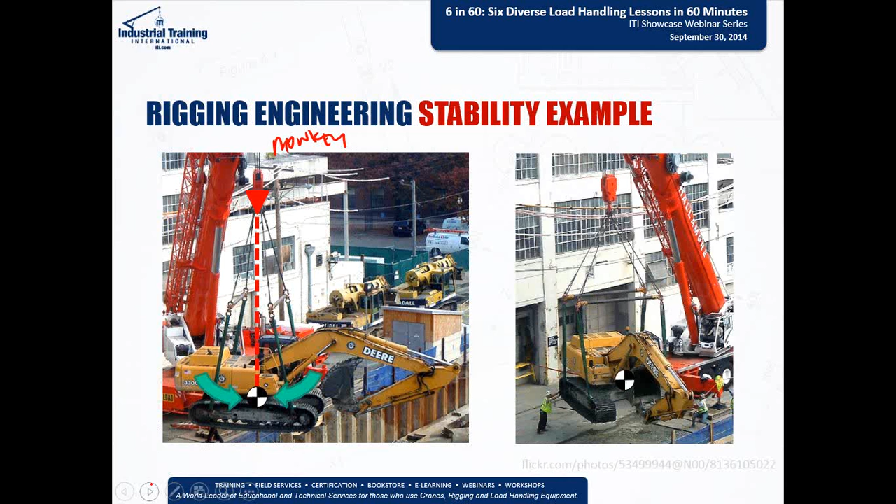If we take that same criteria over to the other profile view, the front profile view of the excavator, now we've introduced a rigging question or problem. Spreader beams and lifting beams are exceptionally helpful to get sling legs out from around loads, as well as spreading the load to the actual pick points that the manufacturer provided. But how do we translate this stability versus instability question to this view?

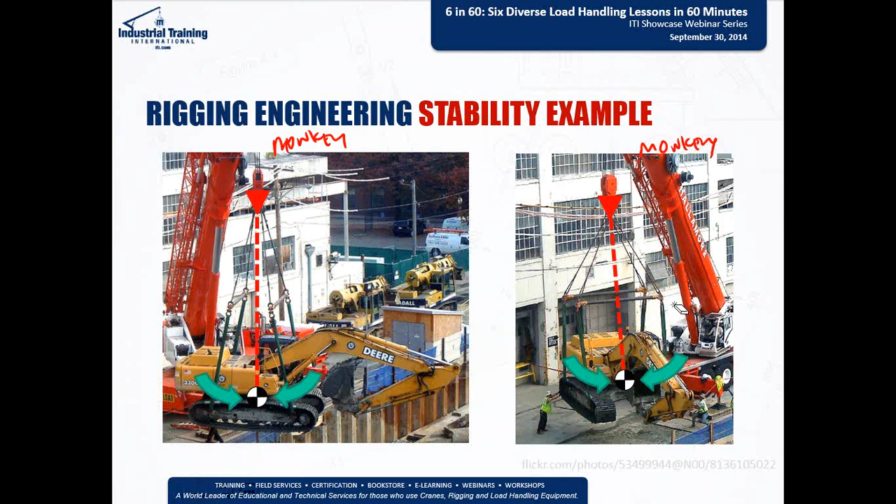We have the same similar monkey situation this way, it didn't change. We can look at the sling angle on top, and the sling legs themselves translate whatever happens above the spreader beam to what should happen or what will happen down below. We can actually translate that angle down over the center of gravity, overlay it there, and see what the actual angle is between the lifting lug and the center of gravity. In both views, we can see that we have a stable position. So this excavator, without any acceleration due to the operator or anything like that, should have a stable position throughout the lift.

You can obviously imagine where this can go wrong. In this case, a company was lifting a much smaller excavator, used the same rigging configuration here, did it just fine. Then they had to move another one, a much larger excavator, and just kind of based on where these sling angles come out and the center of gravity, much higher up on this excavator than...

...the sling angles could afford. If we put it there, we can see that as the upper slings become lower to the horizon and really get underneath that center of gravity, we have that hinge point there, and we're really in this tightrope situation. So you can see where this can go wrong.

It's really helpful to identify where the center of gravity is and how your rigging configuration can capture it with the stability triangle. I know I went a little bit over time.

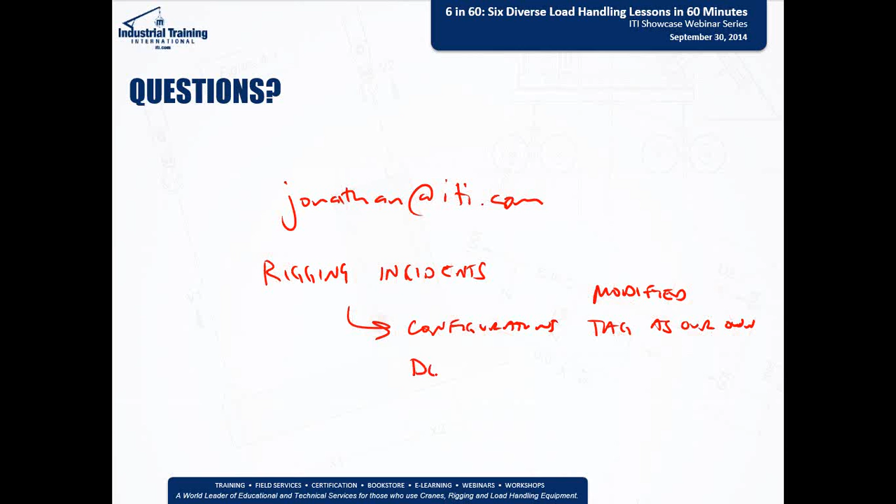But really, these don't have certain design factors or design criteria built into them. In most cases, if you're looking at slings for instance, chain has a 4-to-1 design factor, synthetic has a 5-to-1, same for wire rope. These design factors are built into the system by the manufacturer to ensure that things like dynamic loading and general wear of the sling do not compromise the capacity of the sling itself.

And so we can see that, in my experience, the configurations themselves and modified equipment are kind of the leading causes we've seen in the past. That was a great question.